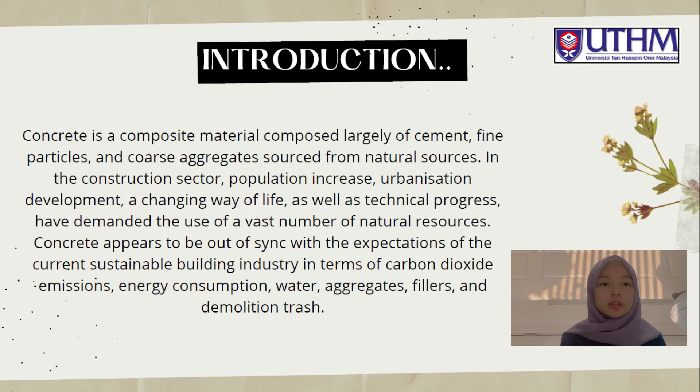Concrete appears to be out of sync with the expectations of the current sustainable building industry in terms of carbon dioxide emissions, energy consumption, water, aggregate, fillers, and demolition trash. Next, agricultural waste used as fine aggregates in concrete include cane ash, peanut bark, oyster bark, sawdust, giant bamboo ash, rice husk ash, cork, and tobacco manure. The location from which this agricultural waste is collected, as well as the procedure by which it is turned into fine aggregates, are the key differences.

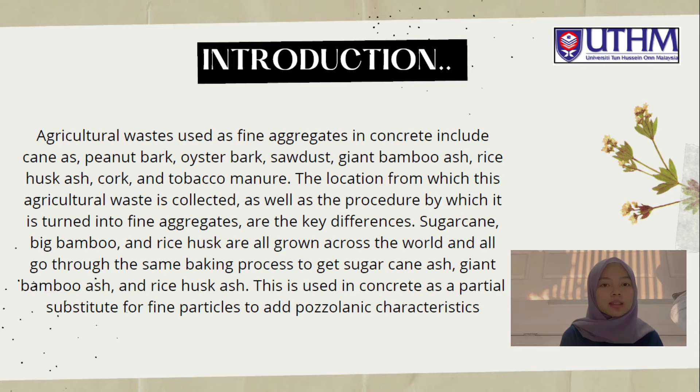Sugarcane, giant bamboo, and rice husks are all grown across the world and all go through the same baking process to get sugarcane ash, giant bamboo ash, and rice husk ash. This is used in concrete as partial substitute for fine particles to add pozzolanic characteristics. Waste paper is a thin material produced by pressing together moist fiber of cellulose pulp derived from wood, rags, or grasses, and drying them into flexible sheets used as paper money, painting paper, etc.

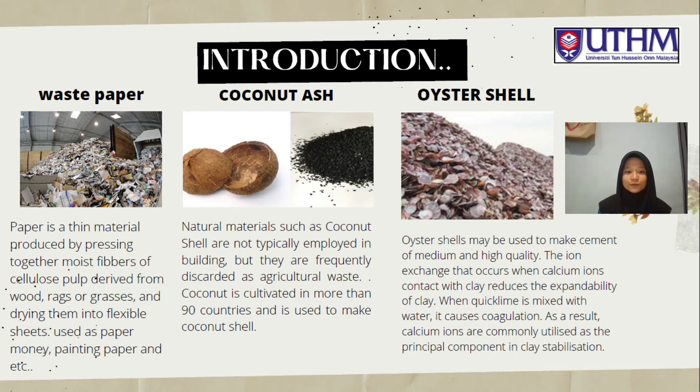Next, we have coconut ash. It is a natural material that is not typically employed in building, but it is frequently discarded as agricultural waste. Coconut is cultivated in more than 90 countries and is used to make coconut shell. Oyster shell may be used to make cement of medium and high quality. The ion exchange that occurs when calcium ions contact with clay reduces the expandability of clay. When quicklime is mixed with water, it causes coagulation. As a result, calcium ions are commonly utilized as the principal component in clay stabilization. Next slide.

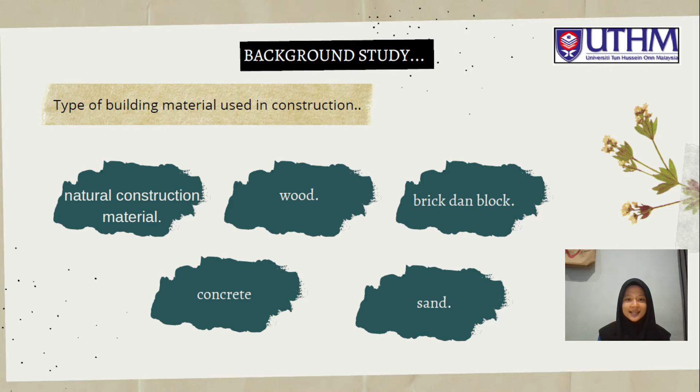Then we have the typical type of building material that we use in construction. First, we have natural construction material. This is the material that is not processed or minimally processed by industry, such as lumber or palm leaf. Then we have woods, brick and blocks, concrete, and sand. Next slide. Now, for the material waste, there are two types. We have agricultural waste and industrial waste. For agricultural waste, examples are palm oil mills and rice husks. And for industrial waste, we have construction and demolition debris.

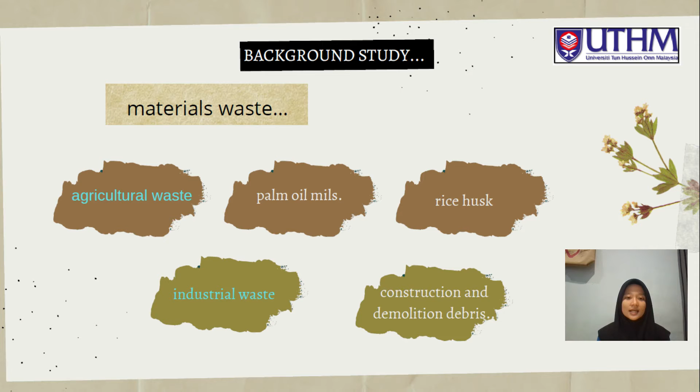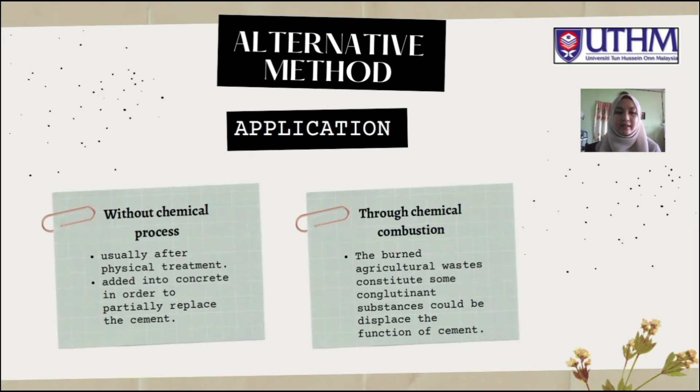Next part, which is the alternative method, will be presented by me, Siti Nordiana binti Buang. So we move to the application for the solid waste. It is divided into two, which is without chemical process and through chemical combustion. The next slide is the solid waste and the potential use in construction material. This is the example of the solid waste that can be used in construction. The first one is the fly ash. It is basically leftover residue from power plants. It is a byproduct from municipal solid waste incinerators.

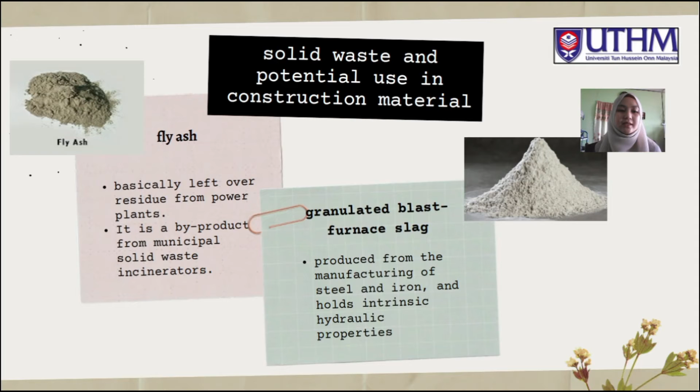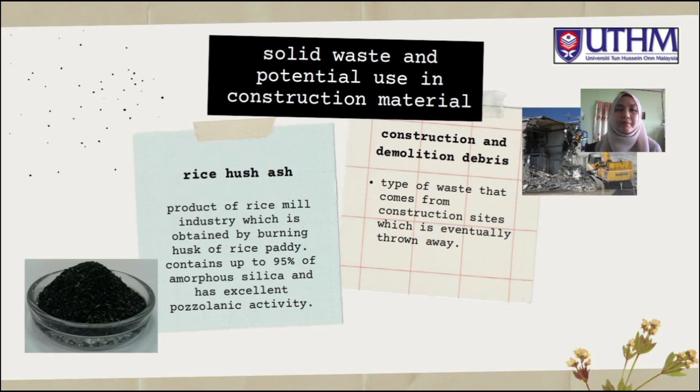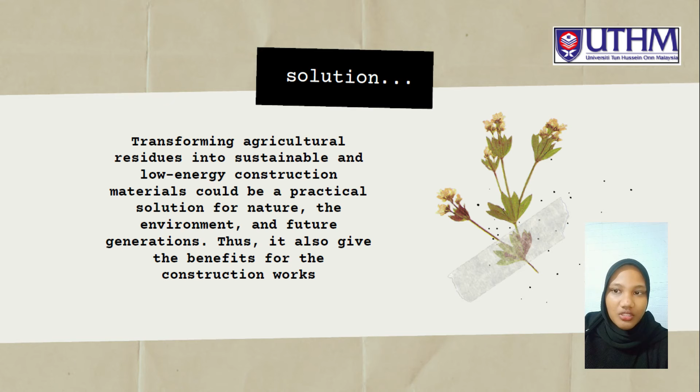Now I will present about the solution. Transforming agricultural residue into sustainable and low energy construction material could be a practical solution for nature, environment, and future generations. Thus, it also gives benefit for the construction work. Type of solid waste number 1 is mineral waste. Source detail is mining waste tailing from gold, zinc, aluminium industry. The recycle and utilization potentials: fine and coarse lightweight aggregate, brick, tile.

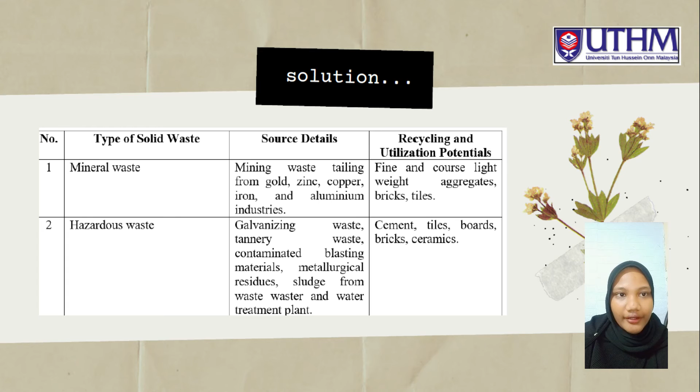Second is hazardous waste. Source detail is galvanizing waste, tannery waste, contaminated blasting material, sludge from wastewater and water treatment plant. Recycle and utilization potential: cement, tile, board, brick, and ceramic. Next is non-hazardous waste. Source detail like limestone waste, kiln dust, lime sludge, waste gypsum, broken glasses, and ceramic marble processing residue. Recycle and utilization potential: hydraulic binder, brick, block, cement clinker, and much more.

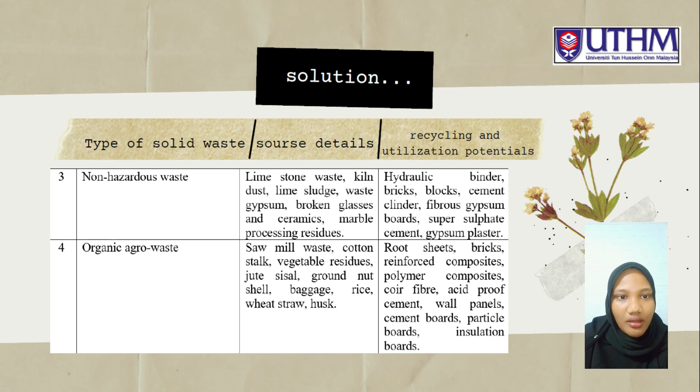Next is organic agro waste. The source detail is sawmill waste, cotton stalk, vegetable residue, groundnut shell, bagasse, rice and wheat straw, husk. Recycle and utilization potential is roof sheet, brick, acid-proof cement, wall panel, cement board, particle board, and insulation boards. And the last one is inorganic industrial waste, which the source detail is steel slag, construction debris, combustion residue, and red mud. The recycle utilization potential is fine and coarse aggregate, concrete brick, tile, paint, block, cement, and wood substitute product.

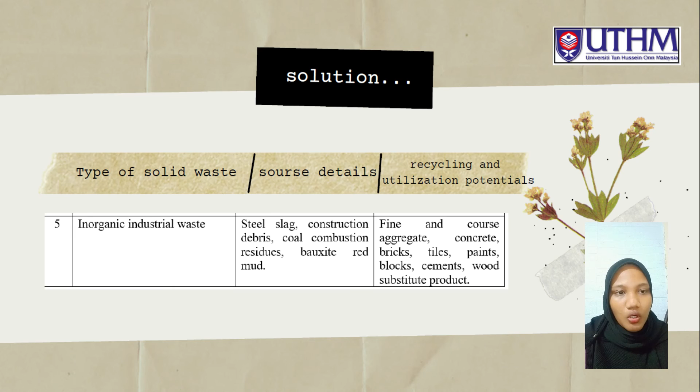My name is Nur Luqman Hakim Mazlan and my matric number is CF200212, and I want to present the recommendation. For palm oil fuel ash, a benefit in terms of concrete strength is caused by the filling effect of the fine ash and the pozzolanic reaction that improves the bond between the hydrated cement matrix and aggregate. It also improves the modulus of elasticity. For rice husk ash, it can increase the normal consistency and the setting time by incorporating RHA into the concrete. It helps in the improvement of the concrete strength and the flexural strength, and reduces the density of the concrete.

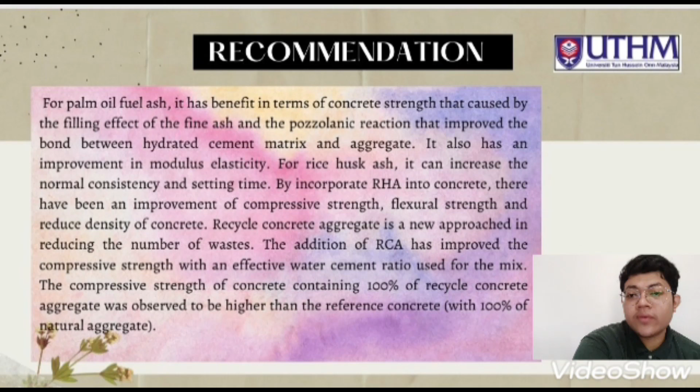Recycled concrete aggregate is a new approach in reducing the amount of waste. The addition of RCA has improved the compressive strength with the effective water-cement ratio used for the mix, and the compressive strength of concrete containing 100% recycled concrete aggregate was observed to be higher than reference concrete with 100% natural aggregate. That's all from our group.